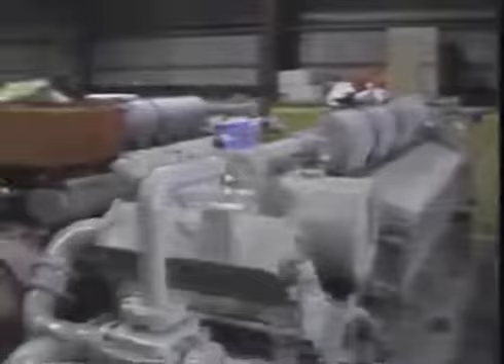This program will tell how to disassemble, inspect, and reassemble the unit. It'll also take a look at how to determine the condition of the parts and whether they can be reused or returned for exchange. Two other programs will show how to remove and reinstall a power assembly into the engine. In the last 3 programs, you'll see how to repair the liner, then the head, and last, the piston and rod assembly. When you finish watching these 4 shows, you'll have a real good handle on how to get a first-rate rebuilt power assembly from your own shop.

All right, let's get started on disassembling and reassembling. First, we'll look at the right way to move it around, and then how to make a preliminary inspection to determine if it's worth repairing. If it's not, we'll see how it should be packed for shipment. If it can be repaired, we'll look at tearing it down, inspecting the individual parts, putting it back together, and we'll look at selectively fitting pistons to liners. If you need to store it, we'll talk about that too. Last, we'll even qualify the rod bearings for reuse or rejection.

Before we start, here's a list of tools you'll be needing. It's lifted with a power assembly lifting tool. You can use a shipping case or some wood blocks to stand it up. You need a 3/4 inch drive socket wrench and extension, or an air wrench, a cylinder head lift tool, piston pulling eye bolt, a snap ring tool, a compression ring expander, a carrier holding fixture or a vise with copper jaws. You'll also need a bore gauge, thread lubricant, silicone grease, and some protectant like Tectyl or Cosmoline.

You may have already pulled your power assembly, so you might know that it has to be handled a certain way. The lift tool has 2 holes. Using one, it lifts straight up, and the other holds it at the right angle for entry to or removal from the engine. Care should be taken not to damage that rod while you're moving it or when you set it down to work on it.

Okay, time for inspection and disassembly. All your power assemblies should be taken apart so that you can find out how much damage there is, even if the whole pack is going to be returned. That's so you'll know what damages are there and you won't get stuck with overcharges when it's sent in for unit exchange. To tear down the assembly, you can start by standing it in its case.

Then remove all the holding tools and hoist. The next step is to remove the 8 head-to-liner nuts and washers with an impact wrench or a 3/4 inch drive ratchet. Of course, you'll reuse them later if they're in good shape.

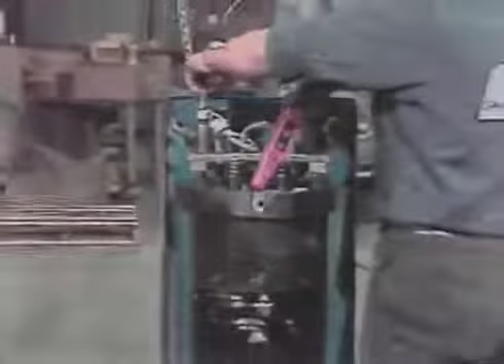Apply the head lifting fixture and screw the 2 long bolts, 6 or 7 full turns, to secure the fixture to the head. Tightening the 2 lock nuts evenly will separate the head from the liner. Apply the hoist and remove it from the liner. Put it on a clean surface and take off the lift tool.

Now you can use a knife or something to remove the gasket from the liner. You have to keep it level as you bring it up and off. If you don't take it off, then the piston rings will get caught on it as the piston and rod come out. Put the lifting eye into the piston with about 4 or 5 turns. Hoist it up to remove it and the rod.

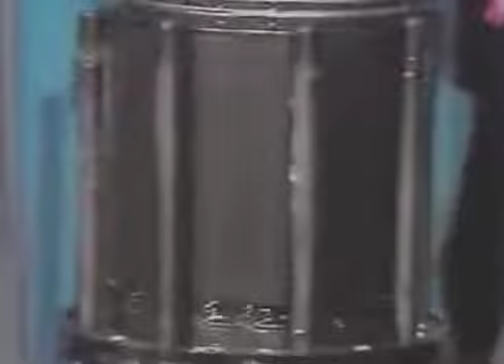Lay them carefully on a clean surface. You don't want to scratch anything. Take off the hoist and lifting eye.

If you don't have a shipping case that's empty and you have to lay your power assembly down to disassemble it, then there are a few tricks you should know. Get a wood block like the piston holding block and prop up the end of the liner. Before the head comes off, pull the piston and rod down until the bottom of the piston is even with the bottom of the liner. This makes it easy to get the snap ring off.

Then you can remove the rod, carrier assembly, and thrust washer. Reach inside the piston and pull it out. The elevated liner helps you to keep from scratching the piston skirt. Be careful during that last inch of pulling the piston — you don't want it to fall out. Support it with one hand so that you can catch it when it comes out. Now, pull out the support block.

Okay, break loose the head-to-liner stud nuts. Just barely, though, because now we'll put that block under the top end of the liner. All right, now, take off the nuts and washers.

The rest of the disassembly is just like we described earlier. Now we've got 3 units separated. Let's begin an inspection. We'll start with the piston and carrier assembly.

If you're tearing down your pack using a shipping case, you still need to get the piston and carrier apart. Get your snap ring tool and insert the ends into the 2 holes on the snap ring. Compress the ring with the tool and take it out. Now pull on the rod and carrier — it should come right out. You may need to jiggle it a little. Check the thrust washer; it may still be stuck inside the piston.

Now stick the carrier and rod assembly into the carrier holding fixture. After you remove the bolts, the rod will lift off. If you don't have a holding fixture, use a vise with copper-protected jaws to hold the rod while you remove the bolts.

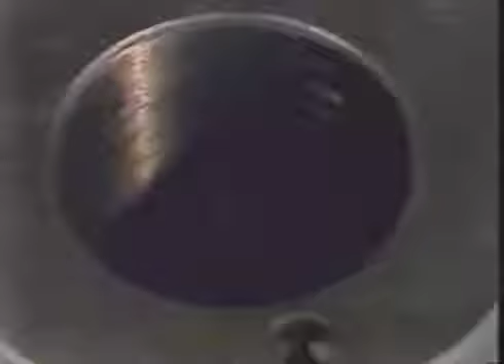If it's good, then leave the bearing in. If it's bad, replace it and the wrist pin. If the pin is damaged, then put a new bearing in with your new pin. You have to keep the bearing and pin mated, just like the basket halves should be mated with the fork rod.

Let's go over to the piston. Put it top side up and get your ring expander. Take the rings off, top one first. When the 4 rings are removed, you can carefully turn the piston over and remove the 2 oil scraper rings.

If you come across a ring that's stuck, get a screwdriver and insert it behind the ring at the gap end and pry outward. If that doesn't work, carefully use 2 screwdrivers to try and move or loosen the ring. At this point, if you think your piston needs any repairs, you should stop and watch the program on Repairs to the Piston and Rod Assembly.

The first step is to remove the valves from the head. The head should still be on a clean work surface of wood or cardboard to prevent scratching the firing face. It doesn't matter whether you use a single or multiple spring compressor. We're using a multiple compressor here.

It simply screws into 2 threaded holes designed for the tool. Once it's screwed in, bring the handles down to a horizontal position. This will allow you to get to the valve locks so that the springs can be removed. Once the locks are removed, release the spring compressor and remove the tool. The springs and the retainers will come right off, and the valves will slide out.

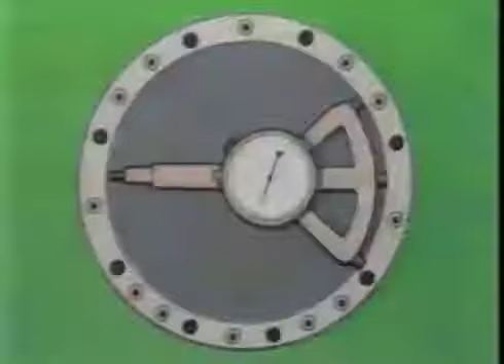Let's check the liner. Look in the water inlet hole — the deflector should be in good shape. If not, another one will have to be installed. You should get the liner bore gauge and check its dimensions at 90-degree angles, at 2 inches, 6 inches, and 12 inches deep into the liner. This is to tell you if the liner can be used again after being honed.

So let's look at the liner and piston together, because you need to make sure that their specs are good, or if selective fitting might be needed. You can mix pistons and liners in order to get within the tolerance allowed for piston-to-liner clearance. This is explained again in the liner repair section of this series. This selective fitting of pistons and liners is done only when the liner bore size exceeds 9 68/1000 inches at 6 inches from the top of the liner after the liner has been honed.

You can use a liner that measures 9.068 to 9.073 inches at that 6-inch location, but only if you find a piston that will leave no more than 22 thousandths piston to liner clearance. Say you had a 9.073 inch liner—you'd have to have a piston with a 9.051 inch skirt diameter.

Review the liner repair program for honing and cleaning procedures. The type of rings are critical too. Cast iron liners have certain kinds of rings, and chrome liners have different rings for the piston. You'll know what kind to use by looking in the parts catalog under your engine model number and choosing the rings for a cast iron or chrome liner, whichever you need.

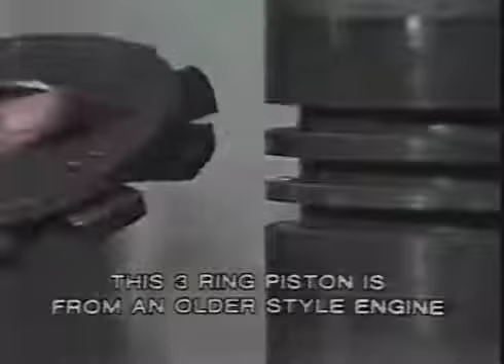While we're talking about rings, there's one more thing you need: the ring groove gauge to measure the top ring groove wear step. Keep trying until you find the one that just fits all the way into the groove, then measure again to find the one that goes in about three-quarters of the way. The difference is the amount of wear and is called the wear step.

Standard width rings are used in the lower 3 grooves. If the wear step is more than 3 thousandths of an inch, it'll have to be removed. If the whole groove is more than 201 thousandths of an inch, the top groove must be recut to 1/64 or 1/32 oversize. This will probably have to be done in a shop.

All right, let's look at where we are. We've decided whether or not our parts are good enough to reuse, and we've honed the liner and cleaned the parts real well. We should be able to begin reassembly. As we go, we'll oil every part to help protect it and act as a pre-lubrication.

We'll start with the carrier and work our way up. If a new piston pin is going to be used, put in a new bearing. If you use an old one, the same pin and bearing must be used, and the bearing should be in the same relative position to the pin as it was when it came out of the engine. Don't use a bad bearing. The bearing slot should be wiped clean with an oily rag.

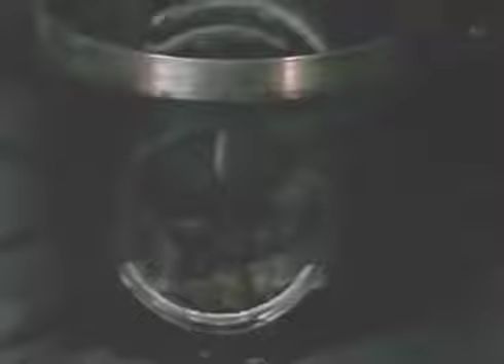And the bearings slid into place. Center it and check the tangs so that when we bend them, everything will be centered. Okay, strike the center of the tang with an indenter tool or screwdriver. Make sure it's snug as you go to the other side and do the same. It should not move at all.

Now coat the whole thing with fresh, clean engine oil. Get your pin, oil it, and slide it in so that the small index hole on the end of the pin is on the same side of the carrier as the piston cooling inlet hole. Make sure it rotates.

And then you can get the rod. Find the serial number on the rod and put it so that it too is facing the same side as the oil cooling hole on the carrier. Put some ThreadTex 2303 on the bolt threads and install the bolts.

Go ahead and tighten them down. Get the bolts down to about 10 foot-pounds and check the spacers. If they move, you'll have to pull that bolt and find out what's wrong. If the spacers don't turn, torque the bolts to 450 foot-pounds.

Now get the piston and install the rings. This is well explained in the program that deals with repairs to the piston, carrier, and rod. You'll put the bottom rings in place first, then the top rings. Always check for any rings marked top on the side and put the word top toward the crown. The number 4 piston ring is a tapered face Ferrox-filled ring.

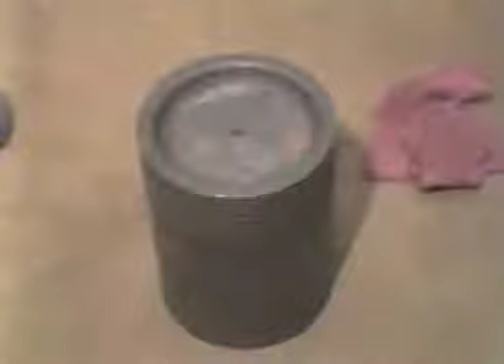If you have a chrome liner, the top 3 rings are going to be different, so make sure you've got the right set of rings for the liner you're working on. When that's done, turn the piston over very gently and make sure the inside is clean. Apply some new oil on the thrust washer platform and then put the thrust washer in place. Get the rod and carrier and put it into the piston. When it's seated, it should rotate freely. Get your snap ring and snap ring tool, and install it into the piston like this.

Now, with a feeler gauge, check the clearance between the ring and the carrier. It should not exceed 25 thousandths of an inch.

So much for the piston and carrier. Let's check the liner. Is it good and clean? Is the water inlet deflector in place?

If so, put the liner in the power assembly shipping case. That way you can stick the rod and carrier in from the top and get it down far enough to allow the head to be put on. If you don't have a shipping case, you could stand the liner up on blocks so that the rod goes down between the blocks just enough to have the piston crown go below the head-to-liner gasket surface.

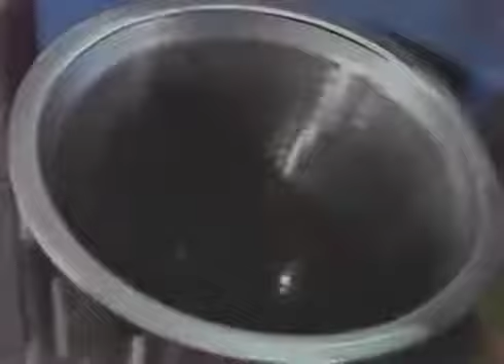All right, get your ring compressor sleeve and clean it out. Put it on the liner and oil it down. Oil the upper part of the liner bore, too, so that the piston rings will slide in okay.

Now, with the lifting eye in place, raise the piston and rod assembly with a hoist. Oil the whole piston surface. Check the ring gaps for proper positioning. The rod's serial number needs to be on the same side of the liner as the water inlet opening.

Carefully lower it into the liner. You might have to jiggle it a little bit so it'll slide on down. When you get the piston crown even with the gasket surface, you should go on far enough down so that the rod is hitting bottom to allow you to remove the hoist. Be sure and take off the lifting eye, too.

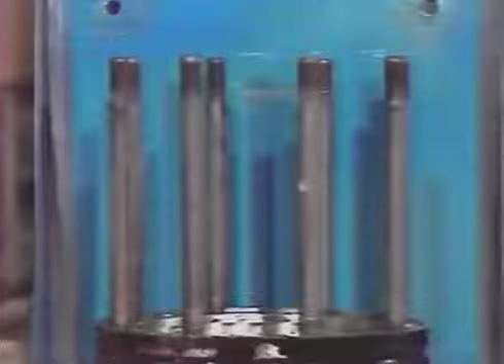Clean off the gasket surface. You don't want any dirt or oil anywhere along there. The gasket will have EMD Top 645 written on it. This should face upward. Be sure that the notched hole is over the pilot stud. The pilot stud has this little flange on it.

Now install the head-to-liner water seals and the heat insulators into the counterbores, and be sure they're not cocked in the hole.

Now you're ready for the head. You might need to put in some valves. If you do put some in, use only new or reconditioned valves. Repairs to the head, like the installation of valves, are covered in the videotape that you may have already seen. It's an easy process. Drop one in each of the exhaust ports.

We'll need to check the vertical distance from the fire face. Check with a feeler gauge to see what the distance is between the flat of the valve and the straight edge. It shouldn't be any greater than 93 thousandths of an inch. If it is, and it's a reconditioned valve, replace it with a new valve to try to get the required dimension.

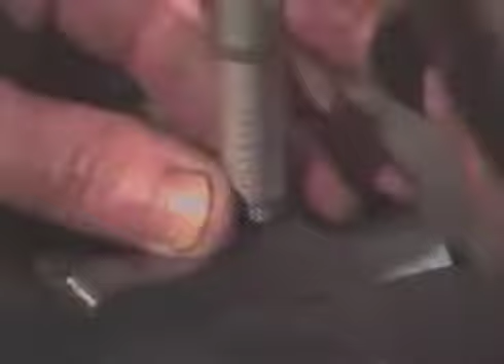If it's still greater than 93 thousandths of an inch, the valve seat has been ground too deeply into the head, and the head will have to be rejected. If all four valves pass this test, carefully turn the head right side up. Be careful not to slide it around. You might scratch the fire face.

Now install the valve springs and valve spring retainers, and put the spring compressor in place.

Now compress the springs and install the valve keepers. Make sure that they're in good condition before you put them in.

Then you can pull the valve spring compressor off.

All right, with the valves now in place, you'll need to check the stem height. This tool can do it, and it's called a valve checking tram. Again, Section 2 of the manual and the program on head repairs will explain this if you have any questions. The clearance must not be more than a 1/16 of an inch.

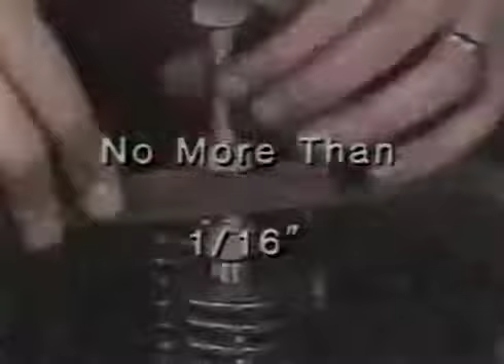If it is, replace the high or longer valve. Don't grind the valve tip, because these are hardened surfaces, and grinding could make them crack. Remember, 1/16 of an inch is the maximum clearance.

With that done, flip the head over and rest it gently on the rocker arm studs with the firing face toward you. You should have a valve seat seal tester. If it's old, you can test it on a piece of glass. It should stick for at least 2 minutes.

To test the valves, clean off the face real well and put a light film of oil on the tester cup. Stick it on over one of the valve seats.

It should stay for at least 2 minutes without losing suction. Just pull the release trigger to get it off. If the suction tester falls off in less than 2 minutes, the seat will have to be reground so you can get a better seal.

You should be ready to put the head on the liner now. Make sure the fire face is clean. Now lower it over the liner. The test valve hole should be directly over the water inlet hole. That way you'll also have the pilot stud in the correct stud hole. Recheck the water seals to be sure they're not cocked.

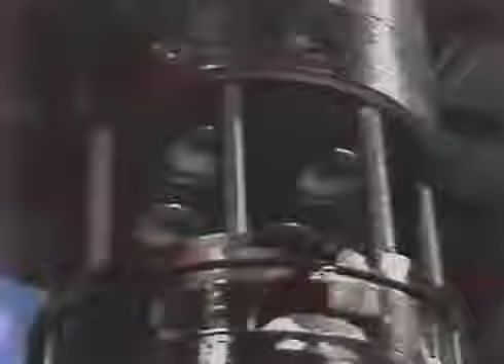If it stops before it's all the way down, it's because of the head lifting tool. Simply loosen the nuts until it goes down. When that's done, remove the lifting fixture and put on the hardened washers, and lubricate the stud threads with Texaco Thread Tex 2303. Now the nuts. Snug them down.

After they're snug, follow the proper torque sequence and torque them all to 75 foot-pounds. Then torque them all to 240 foot-pounds. You'll probably need someone to help hold the power assembly while you torque.

Okay, the nuts are torqued, so let's put on the water discharge elbow. Both the head and elbow surface should be good and clean. A red O-ring will be used between the elbow and the head. Two brown O-rings go on the other end and should be well lubricated with Dow No. 4 silicone grease. Put the elbow onto the head with the two Allen head bolts. Torque them to 30 foot-pounds.

If you're going to install it, don't lift it until you get the piston held in place. If you're going to store it, use the holding bolt and block. If you're going to install it into the engine, use the piston lifting tool. Either way, you should not lift it until your block or lift tool is secure and locked in place. Lift it on up and install the lower liner seals if you're going to install it into the engine.

With that done, put on the rod position clamp and you're ready to put her in the engine, except for one thing. Check your connecting rod bearings. If they're used bearings, they can only be used on the same crank pin journal. Used bearings may have some minor dirt scratches, and that's okay. If the scratches look severe, or if there are signs of discoloration, use a new bearing.

This area on the upper bearing shell where the blade rod rests is a pure lead flash overlay. Some of this area may show wear. That's okay, but like we said, if the wear looks bad, get a new one.

Okay, you've got a power assembly all ready to go. You can store it or put it in your EMD and expect many hours of trouble-free service.

So what do you do if you've got a part that's no good? Ship it. Same goes for anything that you're just not sure about because of not having the proper equipment to measure or check it with. Just about everything that you reject should be returned for credit.

Liners that are scuffed or worn beyond dimensional limits. Pistons that need to be regrooved. Heads that are scratched or nicked in the sealing areas. Or rods that are questionable.

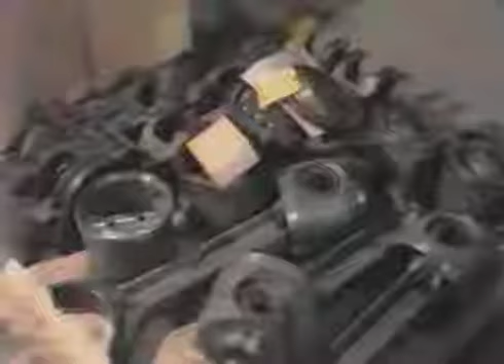Give the parts that you return or store a good coating of protectant like oil, Tectyl, Cosmoline, or something like that. Put it on thick. That salt air gets to metal real fast, and unfortunately, we have to pay for all the damage.

This rod is an example of unnecessary cost to the user of an engine. We feel that the parts that come back in on unit exchange should be as well taken care of as the parts going out. This rod has a smooth surface in most of the areas, but somewhere between the time it was taken out of the engine and the time it got into the shop, it was either rained on or salt watered on, and the blade of this blade rod is rusty.

If you have the original container to ship your parts in, that would be the best. If not, make up containers that are the appropriate size. If several parts are going in the same case, partition the case so that each part has its own compartment, because you know how careless some of these shippers can be.

If you're going to store any parts, make sure they're clean, well coated with oil, and tagged with all the data, like bore diameter and skirt dimension. Pack them up, too. It'll save on cleanup when it comes time to use them. More importantly, it'll protect them from damage.

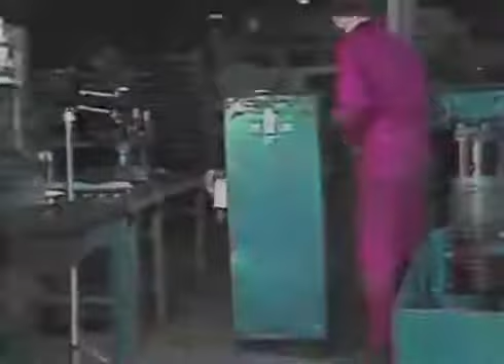Put on the wood block over the rocker arm studs and apply the bolts that attach to the back of the case. Then the rocker arm bolts need to be put on. If it happens to be a fork rod assembly, oil the basket halves and fasten them to the container. Then all that's left is to put on the cover and fasten it.

That's the whole process for tearing down and reassembling your power pack. The other programs on repairs will help you more on the actual repair work. Thanks for watching, and we hope each program will help you more than the last.

The piston and rod assembly are under a lot of pressure all the time, and the clearances are all extremely tight inside that cylinder. So anything that gets inside the piston area, like water or carbon or grit, that can crack, scratch, or score the piston, can end up causing an awful lot of trouble and costing an awful lot of money to repair.

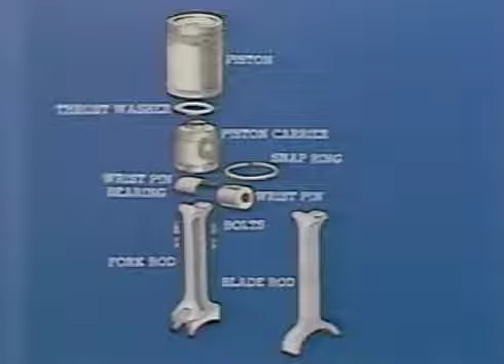The rod, which could be a fork or blade rod. The wrist pin, which is attached to the rod by 2 bolts. The wrist pin bearing. The piston carrier. The thrust washer. And the piston, which is held to the carrier with a snap ring. On the piston, there's also a set of 4 compression rings and a set of 2 oil scraper rings.

Now, getting all this apart is really pretty easy. If you just remove the snap ring with this special snap ring tool, the carrier should slide right out of the piston. Then, by taking the 2 wrist pin bolts out, the rod can be lifted off and the wrist pin can be slipped out.

Keep these parts together and don't remove the insert bearing. We'll figure out what to do with it a little later after we've inspected it. Finally, pull the rings off the piston. Use one of these ring spreader tools. If you try to get them off without one, you're liable to scratch the ring belt area, which could do enough damage to the piston to keep us from reusing it later.

Now comes the cleanup. We'll start with the piston. You're going to need some fuel oil, a wire hand brush, a scraper, and one of the old rings that you ground down to a point, like this.

Let me caution you about something. Use the scraper and wire brush only to remove the carbon from the crown. You can't use it on the side of the piston below the number 4 ring groove. And be careful in knocking the carbon off the piston crown. You don't want to put any scratches or gouges in the piston crown.

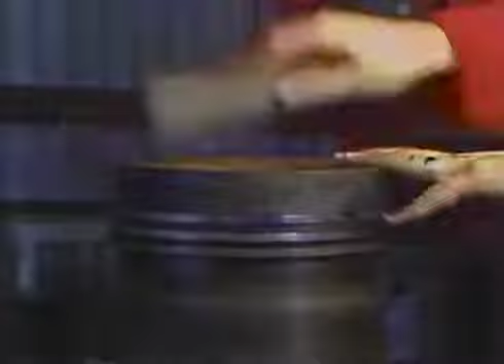Next, your ring grooves. You can use your modified ring that's been ground down to a point like this to get down inside of the groove. This is really an effective tool to use. Just scrape down in there until you've got all the carbon removed from all 4 grooves. Then give it a good rinsing with fuel oil and a steam bath with hot water.

And then blow it with compressed air to get it dry. Let me warn you one more time: don't use any abrasive, emery cloth, wire brushes, scrapers, or anything on the piston skirt below the number 4 ring. Now for the inspection.

Some of the obvious things we'll be looking for are scuffing, scoring, cracks, and mechanical damage that might have been caused by a broken ring or a bent rod.

Next, we need to check for the phosphate coating. Just because there's a little worn area on a piston where the phosphate coating is worn off doesn't mean the piston's no good anymore. You can have up to about 3 square inches of area where the coating is worn off before the piston has to be rejected. If this is the only problem the piston has, it can be sent in to be recoated with phosphate.

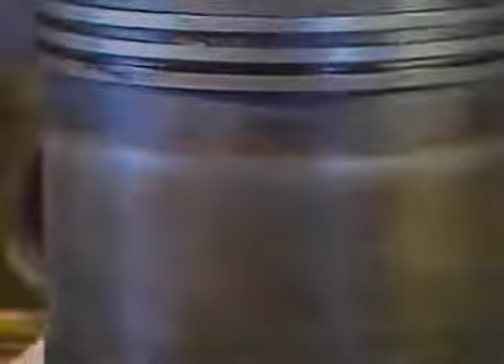Look at the ring belt area. This area is vulnerable to cracks. If there are cracks present, they might be hard to see because they generally start at the base of the groove in the top corner and run along with the groove. So just because you don't see any cracks, it doesn't mean there are not any there.

You can give it a good inspection by either having it magnafluxed or using a dye penetrant. If you suspect a crack, go ahead and check it with the dye penetrant. It'll work the same on all parts of the piston. We'll show you how it works on the crown of this piston. It comes in a 3-part package: the dye, a cleaner, and a developer.

The dye is sprayed on pretty thick. That has to set for about 30 seconds. Then you can wipe it off and clean it with the cleaning solution. Once that's dried, you can spray the developer on. Wait for a couple of minutes. If there are any cracks, you'll be able to see a red indication where the crack is.

Now, this piston doesn't have any cracks, but this head does. This is what your crack will show up looking like. Now, one place you're going to want to look real closely for cracks is the upper corner base of the top groove. That's where most of the cracks will happen, in the ring groove area.

Most of this wear you're going to find in the top compression ring groove. If it's more than this, you'll have to have the groove recut. But if it's going to exceed 201 thousandths of an inch after it's been recut, you'll have to have it recut to the next oversize for use with an oversized width ring. 201 thousandths of an inch is the largest width groove in which you can use a standard width ring. If it looks like you can have the groove recut and it will still fall within specifications, send it in to have it cut to the next oversize.

If you're going to go to an oversized ring, check Section 3 of the engine manual. It'll give you all the specifications you need for recutting the groove.

Now, the connecting rod shouldn't require anything other than just a general cleanup. Be sure not to use anything caustic or any alkaline cleaners on it. We're going to use Stoddard solvent, but you can use anything equivalent to Stoddard's that has a flash point above 140 degrees Fahrenheit.

Now, when you get down here to the blade rod slipper surface, you might find an oil stain. Don't bother trying to remove it because it won't affect the operation of the blade rod. If it doesn't come off with Stoddard's, don't use anything else, including steel wool.

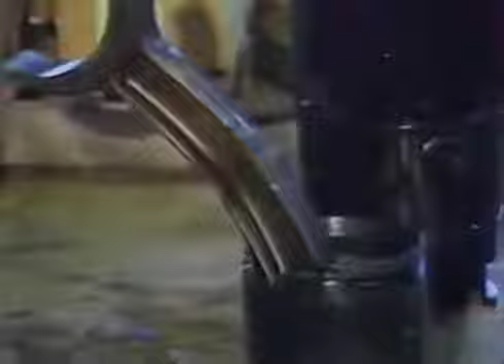Now let's take a look at the rod to see if it's got any severe damage. First thing you ought to look for is any evidence of physical damage. If you see any places where something's been rubbing up against the rod, or if you see that the rod's been bent at all, this is a good indication that this rod is going to fail. Now, if it's bent, the I-beam section might have a little area that's been rubbed away where it's been rubbing up against the liner skirt. If you see this, be sure and go over and check the liner too.

Now, down on the slipper surface of the blade rod, you want to check for overheating, scratches, nicks, rust, cuts, or galling. This should be perfectly smooth. Remember, it seats up against the bearing. Anything down here that indicates there's been a problem should be checked out, and if the problem looks like it might affect the performance of the rod, it should be scrapped.

Now you might see a blue-black discoloration at the top side of the blade rod slipper foot. This is caused by the heat treating process during manufacture. This is normal, it's not caused by operational overheating. The surface itself shouldn't show any signs of heat discoloration.

Next, check the serrations of the fork rod. You're going to be looking for fretting or cracks. The basket halves should fit right up into the serrations, and there shouldn't be any binding at all.

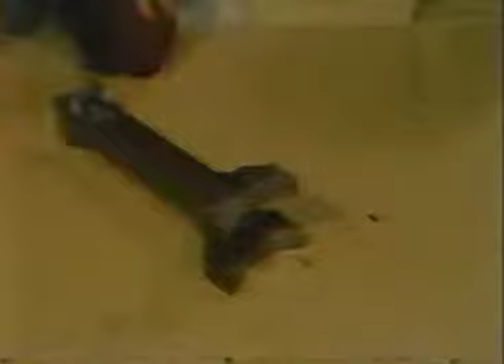Now, anywhere on the rod that you think you see a problem, take a good close look at it. If you can get it magnafluxed, this is a good way to be sure. If not, and you see an area that looks like it might have a problem, check it with the dye penetrant system. If you're not just absolutely convinced that the rod's in good condition, don't take a chance. Set it aside for either a more detailed inspection or send it in and have it inspected with the proper tools.

Now there's one other check on the fork rod that you can do, and you need this plug gauge to do it with. This gauge has a go end and a high end. What you need to do is try to thread the go end into the bolt holes that are used to hold the baskets onto the fork rod. The go end should thread into the holes.

Now as you screw it in, be sure and notice any binding that occurs or any indication of damaged threads. This go end will generally screw in pretty easily. If it wobbles a little bit, you're okay. If it wobbles a lot, you might have a problem. Turn the gauge around to the high side and see if it threads in. Now this isn't a no-go gauge. If it screws in freely, it indicates that you might possibly have a problem. If it's snug or tight, you know it's okay.

If it shakes or wobbles, both the rod and basket should be scrapped. At this point, check your bolts. If they are defective, replace them with new bolts.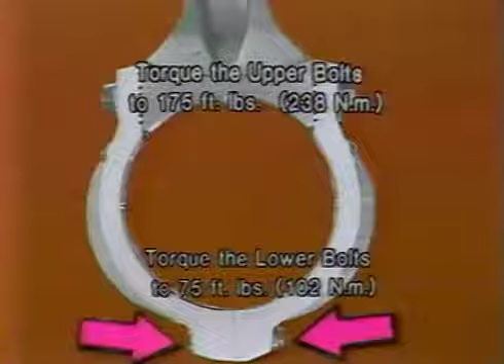The last inspection for the rods that we have is made on the fork rod only. Screw the basket halves together and attach them to the fork rod. Torque the upper bolts down to about 175 foot-pounds, which is 238 Newton-meters. The lower basket bolt should be at about 75 foot-pounds, or 102 Newton-meters. Now, take 3 readings at about 60 degrees apart.

Now be sure to keep the basket halves with the fork rod. These things are line bored as a complete unit and aren't interchangeable with any other fork rods.

Now back up at the saddle end of the rod, you need to take a look in the area that the piston pin sets in. First thing you may be able to see is this figure 8 pattern. This is where the piston pin contacts the saddle, and it's a normal condition.

If you see any nicks or protrusions or fretting, you need to take a fine cylindrical stone or 150 grade abrasive paper and remove them.

Now take the thrust washer off and clean it with a soft cloth. Really, about the only inspection you can make is a visual inspection for galling or overheating or cracks. If you see any damage like this, you'll have to replace the thrust washer.

Take a measurement with your micrometer. Measure the thrust washer thickness at these points. Minimum thickness is 175 thousandths of an inch, and take a reading at several points. You shouldn't see more than 3 thousandths of an inch variation in the thickness. If you do, then replace the thrust washer.

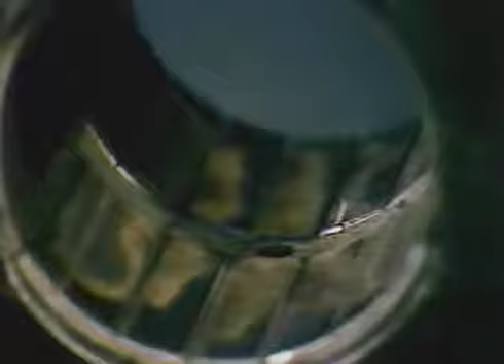The insert bearing is the most critical. Don't remove it until after you've determined whether it can be reused or not, and this is just a visual inspection.

Let's clean it up first. Find yourself a wooden stick. You might cut a point on it so you can get down into the grooves of the insert bearings to clean them out. Don't use anything metal down here because this is a really sensitive surface. It's silver coated, and if you use anything harder than the silver, you're going to end up scratching some of that silver off of there.

If you do that, you're going to have to replace that bearing, and it ain't cheap. Once you've got that done, you can go over the bearing with a petroleum solvent that's got a high flash point, something like Stoddard solvent.

Now, don't ever use an alkaline or caustic solution to clean these parts with, or abrasive materials like steel wool or emery cloth. I don't care how stubborn the carbon is on these parts. Anything abrasive is going to damage the bearing beyond use.

Okay, now let's take a real close look at that bearing. We're going to be looking for damage like galling, smearing, or scoring of the bearing material, or for relatively large areas of pitting from corrosion, or flaking or shelling of the bearing material. Anything that looks like it might create friction between it and the wrist pin.

If you see any signs of anything like this, the bearing will have to be replaced. Now we'll go over how to replace the bearing in just a minute.

If the bearing looks like it can be reused, check it to make sure it's tight. It shouldn't jiggle back and forth at all. If it is loose, take a punch and a hammer and tap the tang down a little bit so that the bearing is nice and snug.

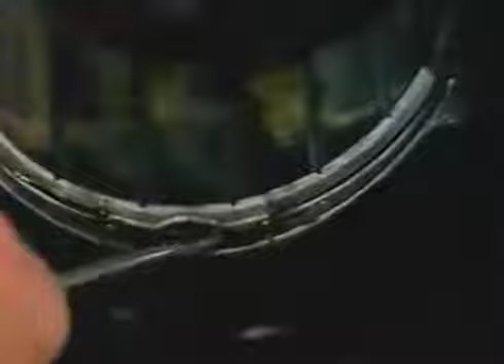Now, let's take a good close look at the carrier and go over the procedure for replacing the bearing. If you have to replace it, just pry the tang up and the bearing should slide right out. It might be a little bit tight because of carbon buildup back between the bearing and the carrier, but it shouldn't be all that hard to get out.

Clean this area out real good. Get all the carbon and trash out of there. Wipe it dry. Very carefully, and you've got to handle these bearings carefully, remove the bearing from its packaging and slide it into the carrier.

Tap one of the tangs down, then position the bearing so that it's snug against the bent tang. Then tap the other tang down. Make sure that they're locked tightly in place and can't slip out. It should be perfectly tight. On the carrier, we're going to be interested in looking for damage along the thrust washer platform area, in and around the insert bearing.

Look for evidence of heat discoloration or galling and tearing of metal on the thrust washer platform. Anything that would keep the thrust washer from spinning freely over the platform surface is going to be a problem later on, so pay close attention to this area. If you see any potential problems, be sure and put the piston carrier aside for closer examination.

Well, that takes care of the inspection and repair work that we can do on location. Now let's reassemble our parts so the piston and rod assembly can be put back into service.

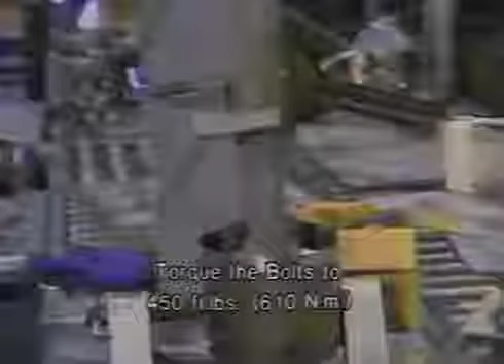The rod should be bolted on next. On both the blade rod and the fork rod, the serial number should be facing the same side as the piston cooling inlet oil hole in the carrier. The bolts should be lubricated with thread techs and tightened to about 10 foot-pounds. Check the spacers, then torque the bolts to 450 foot-pounds.

Now for the piston rings. Make sure you've got the proper sized rings for the piston you're using. Refer to your EMD manual or parts catalog. Set the piston with the crown facing down.

The double hook scraper ring goes on first with the word top pointing toward the piston crown. It goes in the number 2 groove. The bottom ring, the spring-loaded oil control ring, goes in the last groove. Be sure you put the spring ends 180 degrees away from the ring gap. Install the ring with the word top pointing toward the crown. Make sure the spring gets seated in the ring. If it doesn't, the ring will break when the piston is installed in the liner.

Turn over the piston and put on the top ring. The number 4 compression ring is next. It's marked top 2. The top should face the crown.

The second and third compression rings are identical and can be put on either way. There isn't any top or bottom. As you put all of these rings on, be careful not to scratch the sides of the piston.

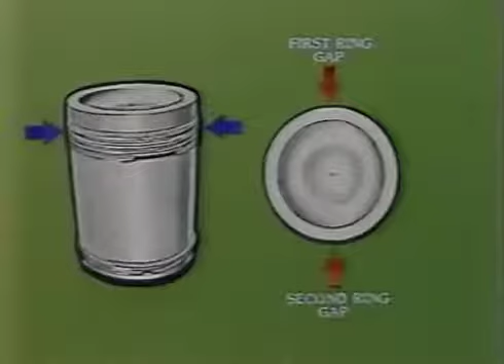Once that's done, adjust the ring gaps so they're staggered. The first and second rings must be 180 degrees apart. The third should be 90 degrees from them. The fourth should be 180 degrees from the third. The oil control rings should be 180 degrees apart from each other. You'll be checking this again just before you install the piston.

Meanwhile, don't set it down on its side. You might pick up trash in the ring area that will cause problems later, or you might damage the bottom rings.

Turn the piston upside down. The thrust platforms and thrust washer should be lubricated. Then put the thrust washer on.

Now the carrier can be installed in the piston. It should bottom out so that you can get the snap ring into the snap ring groove. Now check the snap ring clearance. It shouldn't be more than 25 thousandths of an inch.

Okay, this piston assembly is ready to be installed into the liner. We check the piston crown inside for cracks. We check the wear step in the first ring groove.

We've replaced the rings. We checked the thrust washer platform surface. We checked the thrust washer. We checked the piston carrier and the piston pin and the insert bearing. We also checked the condition of the rod and of the slipper surface of the blade rod and the basket area of the fork rod. That's really about all you can do on the rod.

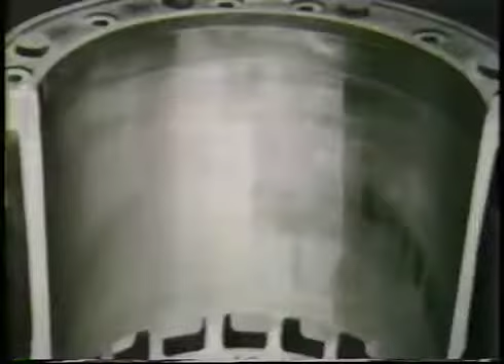The liner is where all the action takes place. In fact, 16 miles of piston passes across the liner's surface every 60 minutes. With all this metal-to-metal contact, and considering the close tolerance of the piston and cylinder, wear is just going to occur. In this program, we're going to take a look at the liner bore that's been removed from an engine and evaluate the damage. If it's repairable, we'll show you how to ream the wear ridge and hone the liner. If it's not repairable at your location, we'll tell you how to determine whether it can be repaired in a shop or not.

One of the first things you ought to do is make sure the liner is completely clean. If it's not, give it a good thorough cleaning with some sort of solvent, fuel oil, Varsol, or something like that. If you find carbon or oil that's really baked on, you can scrape it off if you have to, except in the liner bore area. Make sure that all traces of the old head-to-liner seals are completely removed and the counter bores are clean. After that, finish cleaning it and give the entire liner a good visual inspection.

The most critical area for visual inspection is the bore area itself. First, you should check the liner bore condition and be looking for things like scuffing, cracks, port milling, framing, and gouging. We found a liner that has a lot of these problems, and Mac McGee of Geosource's Power Systems Division is going to go over the problems of this particular liner.

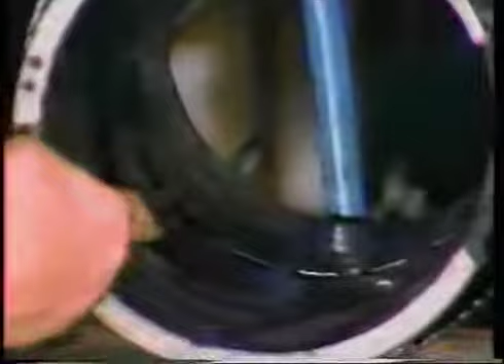The next area to check is the top of the liner, across the gasket sealing surface. Be looking for any signs of damage or erosion. You might also keep a close lookout for any cracks on the base of the upper pilot at the junction of the gasket surface. If you see any, well, this is a sure sign of overheating. Either one of these two conditions will be enough to cause rejection of this liner.

The last visual check you'll need to make is down around the skirt of the liner. Check for milling. If this liner was run with even a slightly bent rod, the rod probably began milling a little metal around this area. If you see any, reject the liner.

As we said at the beginning, a lot of close metal-to-metal contact occurs in the liner area, so there is going to be wear. A piston has to fit in a liner with very close tolerances, and if the inside diameter of the liner is worn or honed out too far, the piston's fit will become sloppy. EMD has come up with maximum specifications for piston fit.

Before you do any honing or reconditioning to a liner, you should check the inside diameter to make sure that when you're through honing, the liner will still fall within EMD specifications. There's a tool for this called the liner bore gauge, which checks for out-of-roundness and liner inside diameter.

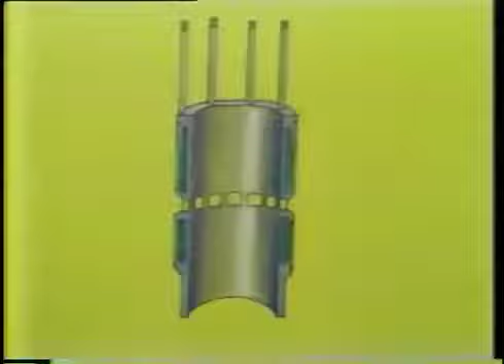At 3 points—2, 6, and 12 inches from the top of the liner—you should take 2 readings 90 degrees apart to determine if the liner is out of round or out of spec. Your first reading should be made with the gauge pointing in the same direction as the crankshaft. Before honing, it shouldn't read more than 9.066 inches at 2, 6, and 12 inches.

If you see more than 5 thousandths difference in the second reading, 90 degrees away, the liner should be rejected. There's a possibility the liner can be bored to 30 or 60 thousandths of an inch oversize, which is a shop repair and shouldn't be attempted on location. If you're using an oversized liner to begin with, you'll be able to tell by the inside diameter whether it's been bored, and whether it can be bored again.

Before you start honing the liner, if it's close to exceeding EMD specifications and you have scuffing or damage you can feel, by the time you finish honing it will probably be out of spec, and all your time and effort will have been wasted. Be sure, before you put in the effort, that it's going to be within specifications after you finish honing.

After honing, the maximum dimension allowable by EMD is 9.068 inches at 6 inches deep into the liner, unless pistons and liners are selectively fitted. Then the maximum dimension at the 6-inch location would be 9.073 inches, providing a piston of 9.051 skirt diameter is used.

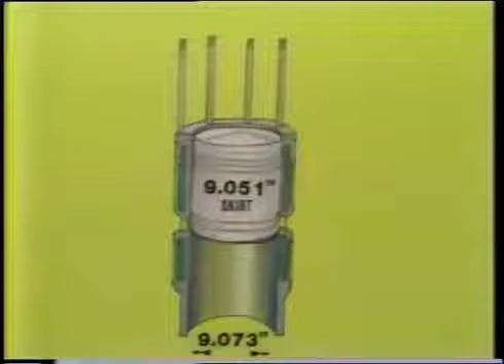This will ensure a maximum allowable piston-to-liner clearance at the 6-inch position of 22 thousandths of an inch. If not selectively fitted, the maximum liner diameter at the 6-inch position would be 9.068 inches. The maximum dimension allowable at the top limit of piston ring travel is 9.083 inches.

Once you're through with the visual inspection of a liner, and it passes all the points brought out so far, the next thing to do is check the wear ridge. The wear ridge results from the rings wearing against the cylinder wall. When the piston is at top dead center, you'll notice the rings don't reach the top of the cylinder.

Since the rings aren't wearing on the upper one and a quarter inches of the cylinder wall, this portion isn't subjected to quite as much wear as the rest of the cylinder wall. This is what causes the wear ridge.

Before the liner can be honed out, the wear ridge has to be removed, and this can be done on location if you have the proper equipment. You need a liner ridge reamer, which can be operated either by hand or with a heavy-duty drill motor if you use a speed reducer.

This is a critical operation, so be sure to read this portion over in your EMD maintenance manual, section 4, before you attempt it. However, if you don't have the proper tools, don't try to do this—just pack the liner up and ship it for reworking.

If you do have the proper tools, make sure you know how to operate everything correctly and that everything is in good condition. Then read the instructions in section 4 of your EMD maintenance manual. First, check the cutting blade of your reamer and make sure it's in good condition. If not, you might have to resharpen it or replace it with a new one.

Before you set the reamer inside the cylinder, oil the cylinder walls, and be sure the felt pad in back of the cutter is full of oil.

Naturally, you'll need to retract the cutting blade so it'll be out of the way when you set the reamer down inside the cylinder wall.

The reamer should be set down inside the liner until the depth stop rests on top of the liner. Once you've got it seated down in there, tighten the centering nut to hold the reamer in position. Turn it 1 or 2 turns to make sure that it's centered up.

Now you're about ready to start reaming. You'll need to pull the blade retarder cam back to allow the cutter to be released and move into position. Then turn the reamer a couple of turns manually to get it started.

If you're using a motor, you can use an ordinary heavy-duty electric drill that operates at about 500 RPM without a load. But you will need to use a motor drive and speed reducer. Once the speed reducer is in place, you can start reaming with the motor.

Keep plenty of oil on the surface being cut. Continue to turn the reamer until all of the wear ridge is removed.

Once you've completed this, you can pull everything out and give the liner a good cleaning. Make sure that you get all of the oil and cuttings out of the liner.

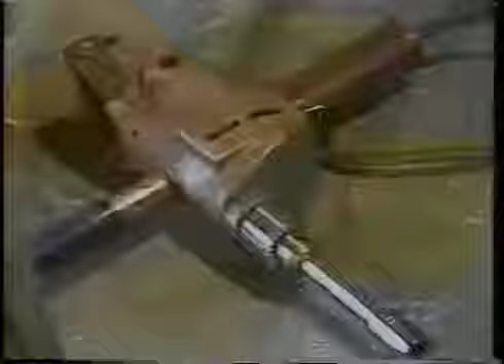Now the last step in reconditioning the liner is honing. For this, you'll need a honing kit, electric drill, stone cleaning brush, and a cylinder honing fixture.

The reason that a cylinder is honed is to knock off the glaze and provide a surface that new piston rings can seat to, and to remove light scuffing.

The object is to have a slightly rough finish inside the liner with a 45-degree crisscross pattern that covers the entire liner wall. This is done by moving the hone up and down in the cylinder at about 30 complete strokes per minute. This will give you the 45-degree crosshatch pattern that we're looking for.

Now, before you go any further, make sure the cylinder you're about to hone is a cast iron cylinder. If it's a chrome liner, it'll have a mirror finish. Don't try to hone a chrome liner.

Now, the hone has to be equipped with a set of W47-J43 stones and guides to protect the surface and finish it off to the proper roughness.

Be real careful in installing these on the hone. If you damage them, you'll have to get a new set, and these things aren't cheap. Check and make sure that they're clean. If they're not, you might want to clean them with a wire brush.

Before we get started, let's take a look at the way it's done in the shop. A cylinder is put into position in a rig similar to this.

The rig makes 30 strokes per minute. The liner wall is continuously washed down with fuel oil.

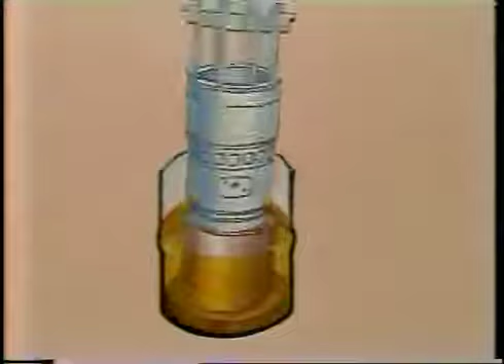You're probably not going to have one of these rigs out on location. So the easiest way for you to set up to hone your liner is to set it in a tub that's capable of holding 10 gallons of fuel oil.

The liner should be set in the tub, top side up. Fill the tub with fuel oil up to a point that the hone will be able to wash itself on the downstroke. As the hones turn and move up and down, the liner walls will be continuously flushed with fuel oil, and you want to make sure that the liner isn't going to be moving inside of your tub while you're doing the honing.

Now set the hone into the cylinder so that the stones don't stick out of the top of the liner more than ½ an inch.

On the center pinion assembly of the hone, you'll find a ratchet type affair for tightening the stones against the wall. They should be snug against the liner wall, but not torqued down.

Now you're just about ready to start honing. Your motor should be capable of somewhere between 345 to 500 RPM. Start your up and down motion with 30 strokes per minute.

Every now and then you might have to stop to tighten the stones up a little tighter against the wall. You should never let them run loose. This doesn't do any good as far as roughing the surface, and it could allow the stones to chatter inside the liner if they get too loose.

This can permanently damage your liner. As the hone turns, if the pressure is right, you'll hear a steady grinding noise.

Just hone long enough to break the glaze and be sure all of the surface area is honed. Then you start hearing the drill motor spinning without any strain on it. Best thing to do is adjust your tool.

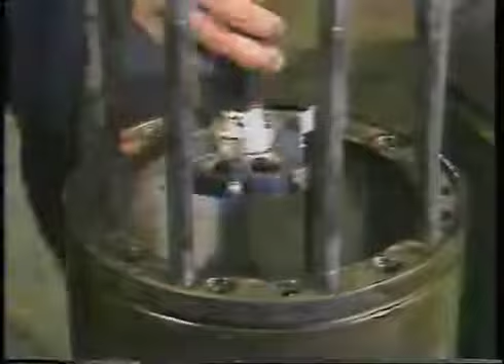If you plan on storing your liner, make sure that you have plenty of oil left on the surface of the cylinder walls to keep it from rusting or corroding. To replace a broken liner stud, it'll probably be necessary to remove it with one of these gadgets or by drilling and using an easy out.

Once the broken stud is out, a new stud may be applied after checking the threads in the liner with a tap. In addition to the standard size, there are various oversizes, as shown in the EMD parts catalog, in the event the standard stud is loose.

The new stud should be driven so it extends 9.5 inches above the gasket surface. Use a minimum of 50 foot-pounds torque.

Be careful. There are 2 different type studs on a liner. One is the liner locating or pilot stud. It has a shoulder just above the gasket surface of the liner. This stud can only be used in the position above and to the right side of the connecting point for the water inlet jumper.

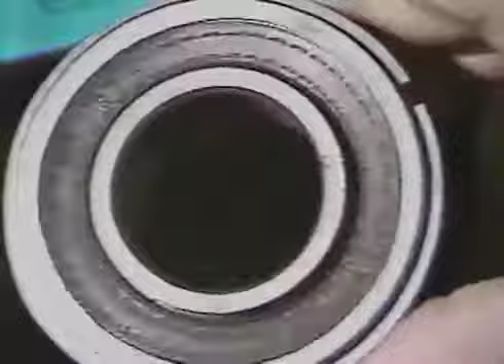The water pump has always been one of the weak points in the EMD. Most of the failure reports that we get in Dallas on water pumps are bearing-related problems. So EMD introduced a new sealed bearing to help improve the life and reliability of the pump. This bearing comes separately or as a part of their repair kit. Like I said, most of the problems you'll see with the water pump will be bearings, and they're usually pretty easy to determine. Mac McGee has some tips for you on this.

Basically, there's not any real good way of troubleshooting a water pump.

The main thing is you'll find that the engine's not cooling, and naturally the first thing you suspect would be a water pump. As you go around through your engine room, get accustomed to the noises these engines create. As you walk past the front end of this engine and the noise sounds different than it did yesterday, go check the water pump.

You can take a screwdriver and put it against this part of the housing for the bearing next to the gear train, or this part of the housing for the bearing out next to the impeller, with your ear against the other end of the screwdriver, and you can definitely hear the bearings running in that water pump. If you don't hear anything unusual there, go to the other side of the engine and try that water pump. Most assuredly both water pumps are not going out at the same time. Whichever one's the roughest, that's the water pump giving you the problem.

One of the other things to look at is possible discoloration in this area right here. When you get that discoloration, that bearing has already failed. It's going out on you completely. The water pump is overheated in that area, and you need to shut the engine down immediately.

Before you start your overhaul, make sure that you have a full EMD water pump repair kit. In addition to the bearings, it comes with most everything you'll need: the gaskets, seals, self-locking nuts and bolts. It's all in there. It's kit number 954768-3. Now don't skimp by trying to replace just the bearings. Compared to the price of a new water pump or the price of 8 power assemblies, it's cheap. In 1983, the full kit listed for $102, so don't skimp. When the PMS calls for an overhaul, put the full kit in.

The removal and installation are pretty straightforward, but do remember to drain the cooling system before you take one off. You remove this dresser sleeve, take this line down at both ends, remove the bolts around the face of the water pump where it goes onto the accessory drive housing, and slip the water pump out.

What we're really interested in is the disassembly, inspection, and reassembly of the pump. Let's start with the tools. Some of them are special tools, but they're things you can make pretty easily on the rig. These two, for example, help drive the bearings onto and off of the shaft. This green one's a 2-inch diameter pipe, 10 inches long, with one end having a plate welded over it. The red one's a 2-inch diameter pipe, 8 3/4 inches long. Notice that this wall has been beveled down on the inside diameter.

We'll be using the gear puller, a rubber mallet — the manual calls for a rawhide mallet, but this one works just as good — and various sockets and wrenches. And you'll need your repair kit.

Before we start disassembling the water pump, let's take a quick look at how it's made. The water pump shaft is held in the casing by 2 bearing assemblies. These bearing assemblies are spaced apart by a bearing spacer. The inner bearing is held in place by a retainer and snap ring to absorb the thrust in the shaft. On one end of the shaft is the drive gear, on the other end is the impeller. Both are locked to the shaft by Woodruff keys and held in place with self-locking nuts.

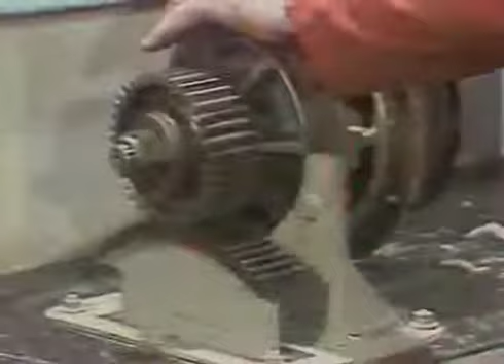This box is used to suspend the pump so that the bearing assembly can be dropped into place, allowing gravity to help keep it straight so that it doesn't bind, and so the shaft can drop straight down without hitting anything. This pump support bracket was designed by one of the mechanics on the Sedco 471. It's pretty easy to make, and it makes torquing and untorquing the shaft nuts a lot easier without damaging the teeth.

It's made out of a damaged idler gear. A sixth of the gear has been cut out here and welded to a mount so that the pump drive gear is locked in place when the pump is bolted on. If you don't have a damaged idler gear, a half of a damaged drive gear will work just as good.

The first thing you want to do is loosen the impeller nuts and suspend the pump gear end upwards so that it just clears the workbench. Then remove them. Once the nuts are off, the housing might let loose on its own. This one did. If it doesn't, use your rubber or rawhide mallet to tap it and break it loose.

Make sure that your water pump isn't more than a few inches from your workbench so that when the impeller housing drops off, it doesn't fall very far and get damaged. Once you've removed the housing, you can pull the pump off of your support.

And now would probably be a good time to inspect that impeller. You want to be watching for problems like this. Things like this will cause the pump to be unbalanced and could cause other damage inside of the pump if it's reused. Be sure to look very carefully for any signs of damage at all that might cause the impeller to be unbalanced.

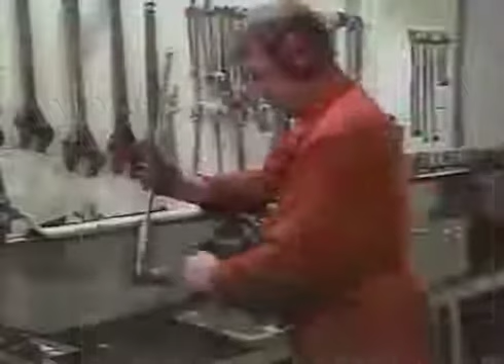Next, pull the drive gear nut and washer. Be careful not to damage the gear teeth if you're using a vise. Before you take it off, you also want to remove the impeller end nut and washer.

Now, the drive end nut and the impeller end nut are both self-locking. They should only be used once. If you reuse one, there's a good chance that it'll loosen and come off inside the engine.

There's the result of something like that happening. This drive gear loosened while it was operating inside of the engine. The vibration of the loose gear broke these teeth and these teeth on the idler gear. This type of repair, if this pump can be salvaged, will end up costing thousands of dollars and a lot of man-hours. So when you take these nuts off, be sure you throw them away.

After you've got the two nuts taken off, you'll need to use your gear puller to pull the drive gear off. It's held in place with a Woodruff key. So you'll need to be sure and get the key out too.

Next, you'll want to remove the bearing snap ring and bearing retainer ring.

There's one thing you might notice here. Take a good close look at the edge of the housing. This one's been chipped and eaten away. We'll take a closer look at it a little later, but this housing may have to be replaced.

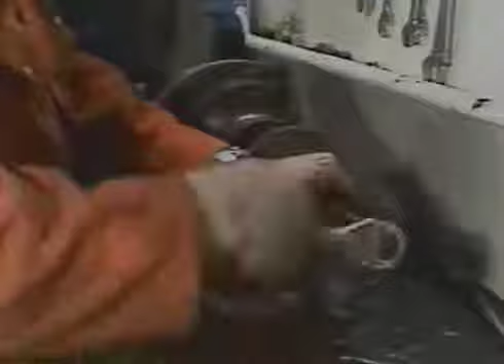Next, you'll want to put your gear puller or impeller puller on the impeller end of the shaft. Notice here that we're putting the legs across the outer housing and not on the impeller itself. If your impeller is any good, you'll damage it by putting the legs on the impeller. As you press the shaft out of the housing, the impeller will release and you'll be able to take it off of the shaft. You'll also free the shaft up as the bearings disengage from the housing.

It's a good idea, once the shaft reaches this point, to go ahead and pull the impeller off and remove the impeller shaft key and the seals. The seals consist of a spring, a seal retainer, an outer seal, and a carbon seal. When you're rebuilding your water pump, these are some of the main items that are replaced.

A little light tapping with a block of wood, and you'll be able to easily work the shaft and bearings out of the housing. Don't hit it hard. If it locks up on you, it's because it's coming out crooked. Try to straighten the shaft out as much as you can, and continue to tap lightly with your block of wood. It shouldn't take a lot of force to get this out.

The next step is to remove the stationary bushing. It's held in place by 6 bolts at the rear of the water pump. This is replaced too because the bottom surface is what the carbon seal seals against. If there are any scratches or scores at all, the seal won't have integrity.

Once the 6 bolts have been removed from the stationary bushing, it may or may not come off easily. If it's stuck, a few taps with a rubber mallet will loosen it. If not, there are 2 threaded back-off accesses. You can use the bushing bolts to back the stationary bushing off of the pump housing.

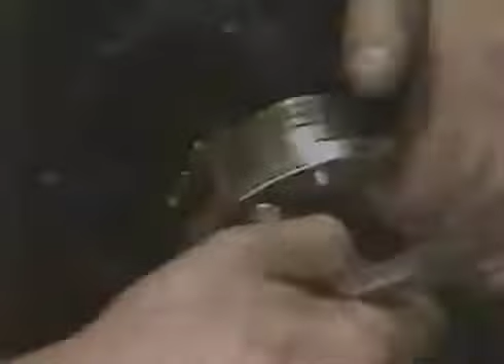The next step is to remove the bearings because we're going to replace them. The inner bearing has a snap ring groove, the rear one doesn't. The shaft assembly consists of the shaft, the water slinger, the outer bearing, the bearing spacer, and the inner bearing. On the older bearings, both the inner and outer bearings are designed with an offset on one side. These offsets should always be positioned to the outside of the shaft. If you have any question as to which side we're talking about, the part number is stamped on the offset side.

That part number should always point to the outside of the shaft. The new bearings are offset on both sides. Don't forget that the inner bearing has this snap ring too. Mount the shaft assembly in your vise with jaw protectors holding on to the bearing spacer.

Attach your gear puller to the inner bearing and you can carefully pull the bearing off. Be careful not to drop the assembly when the inner bearing comes off. Then the bearing spacer will slide off.

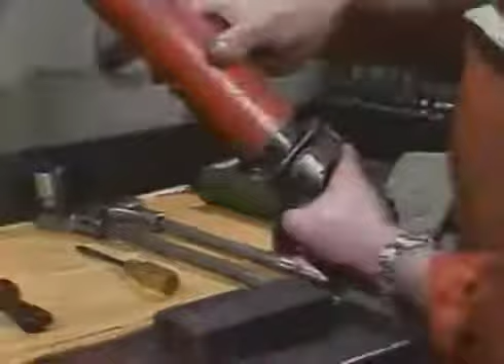This tool that we were talking about earlier was made in the shop. It fits down over the bearing shaft assembly, and you'll notice that the edge has been tapered off so that it matches the taper on the water slinger. We're able to drive the bearing off easier with this thing without damaging the water slinger. This tool will only drive it off of its own bearing seat. Use the gear puller to pull it off of the other bearing seat.

Once this is done, you'll need to give the shaft a good inspection. In fact, all the parts ought to undergo a very close inspection to determine whether or not they are reusable.

Now, remember a little earlier, we were talking about this part of the housing. If you take a good close look, you'll see that there's a discoloration near the bearing area, and it looks like some parts of the neck have been overheated and chipped away. Whatever caused it, it's obvious that it'll have to be scrapped. Here, compare it to a new housing. See the difference?

Also inspect the impeller for any damage at all. An unbalanced impeller will cause a lot of damage real fast. Be sure to inspect the impeller housing. Before reinstalling an impeller, check to make sure that all of its parameters are right. There has to be the proper clearance between the impeller neck and the impeller housing.

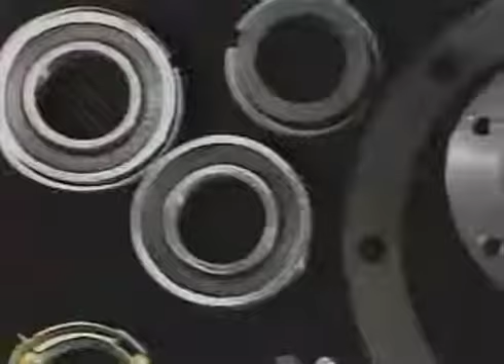You can order the bearings with a new water pump repair kit. Here's the part number, 954-7683. This kit includes the gear end bearing and the impeller end bearing, as well as all of the seals and gaskets you'll need to rebuild the water pump. It also includes a new stationary bushing. We recommend that whenever you rebuild a water pump, replace all of these parts with the new kit.

A little silicone grease on the bearing seating surfaces will make it easier to get the bearings installed. Here we're installing the old style bearings, but you'll probably be using the new style. The inner bearing is the one that does not have the snap ring groove. It can be installed either way if you're using the new style.

If you're using the old style, there's an offset that should point to the outside of the shaft. A few easy taps, being careful to make sure the bearing is going down straight on the shaft. Light taps should be all that's needed to get the bearing seated. If you have trouble driving it on, it may be because it's cocked, so be sure it's going on straight.

You'll need to drive it down all the way, flush against the water slinger. Next, the bearing spacer sleeve goes on. It can go either way.

Then, finally, the outer bearing, the one with the snap ring groove. The offset points outward, and the snap ring goes to the outward side. Again, a few taps on the bearing will cause it to seat right into place.

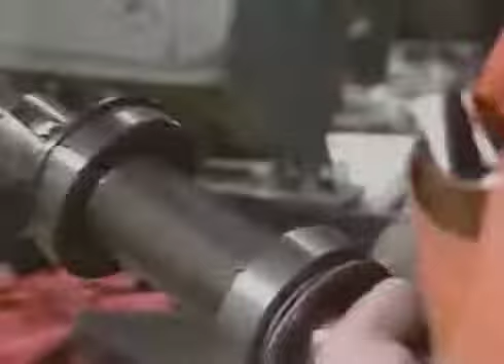Next, set the water pump housing in a holder of some type. Before you install the shaft assembly, be sure to put silicone grease on the bearing seat surfaces. This will help when you install the assembly by lubricating the surfaces as the bearings are driven through the housing. A little silicone grease on the inner bearing itself is a good idea too.

Now you'll need to tap the shaft into place, slinger in first. It's going to be a tight fit, but you don't have to use a lot of force, just moderate taps. As you seat the outer bearing in the outer seat, make sure that the shaft is perfectly straight.

Then go ahead and drive the shaft and bearing assembly all the way down until the snap ring meets the groove that holds it in place.

Once the bearings in the shaft have seated themselves, install the bearing retainer ring and the snap ring. Make sure the snap ring seats all the way. Once you've got the snap ring in place, make sure that the shaft still turns freely.

The next thing to be installed is the stationary bushing. Make sure it's perfectly clean. This gasket goes between the bushing and the housing. You should use those 6 special self-locking bolts on this bushing.

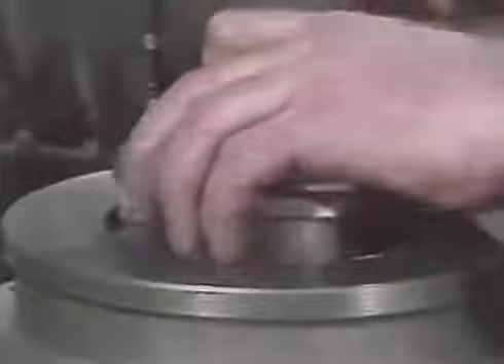As you tighten the bolts down, make sure you tighten them in the right pattern. Tighten them to 50 inch-pounds first, then torque them down to 100 inch-pounds, or 11.3 Newton-meters.

Once you've got them torqued down, make sure that the sealed surface area is completely clean. Before you install the rest of the seal, you need to check the runout on the carbon seal to make sure that it's seating right. You do this with a micrometer. Check it out to specifications in your EMD manual.

First, we'll install the carbon seal like this. Again, make sure everything is perfectly clean. There are 2 feet on the seal retainer that fit into notches in the carbon seal.

The flat side of the outer seal should contact the carbon seal. The concave side should fit up against the inside of the seal retainer ring. Make sure those little feet seat down inside the slots in the carbon seal.

Before you install the seal spring, you'll want to put the impeller key in place and check the depth of the key against the shaft key seat to make sure that there's clearance.

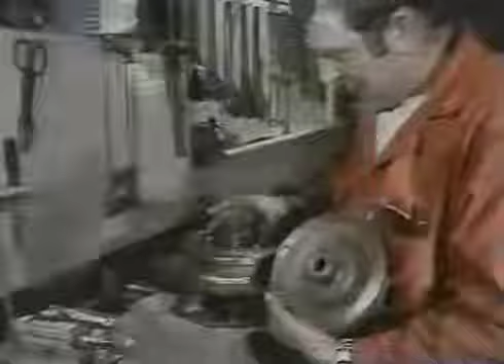The narrow end of the spring goes in first, and this foot on the spring fits into the tab of the seal retainer. Now we can install the impeller on the shaft.

Notice when you get this installed that the large end spring foot fits into a notch in the impeller. You'll need to make sure that this seats while you're installing the impeller. The best way to do this is just make sure that the foot is positioned 180 degrees away from the impeller shaft key. Otherwise, the impeller won't seat.

Now we can install the drive gear key and the drive gear. When you're installing this gear, make sure you put it on the right way. If you look at both sides of the gear, you'll notice that one side has a deeper inset than the other side. The deeper inset should go toward the housing.

Next, secure the assembly. Both of these nuts have self-locking devices on them. You should only use them once, then they should be thrown away. New ones are not included with the kit, so you'll have to order them separately. There have been a lot of pumps in the field damaged because one of these nuts came loose. We've already put the drive gear washer on. This nut gets torqued down to 265 foot-pounds.

On the other end, we install the impeller end nut and washer. This nut gets torqued down to 80 foot-pounds.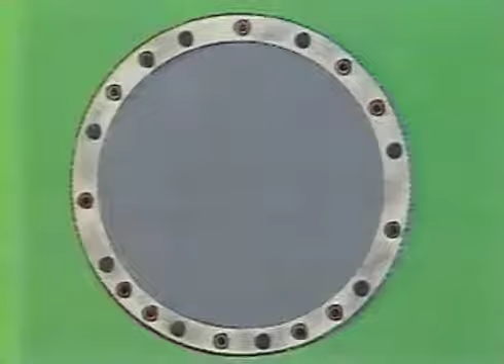Check here too. Now, you might have noticed when you pulled the head off that your head-to-liner grommets were cooked out. This means that the head overheated and was probably damaged to the point that you can kiss it goodbye. If these grommets appeared to be okay, and you didn't see any physical damage, then you can go on to the next step, which is a thorough cleanup.

You need to use a suitable solvent like Varsol or fuel oil to loosen that baked-on carbon. It's okay to use a scraper on the outside diameter and the portion of the firing surface that's smooth. But on the portion that's grooved like a phonograph record, you should use a wire brush in a circular motion to help get down into the grooves and clean them out.

The stud holes, injector well, and valve guides need a good cleaning too. Use a bottle brush with a stiff fiber bristle. Everything has to be really clean. That's important in the next inspection step and in the life of the head. And that means less work for you in the long run.

Don't forget to clean the rest of the parts too. The springs, spring seats, and spring locks or keepers should be cleaned with the same kind of solvent. Now keep in mind that the problems are easier to detect on a clean head, so any extra effort in cleaning at this point will probably pay off.

Once you have all the cleaning done, we can give the head a more critical inspection. First, we'll check all the parts visually. Then we'll give the head a water test and dye penetrant test, and we'll check the head dimensionally.

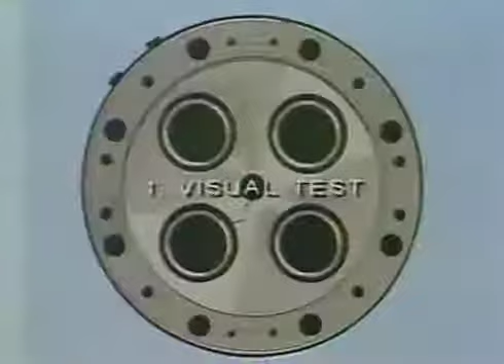The eyeball test is first. Look for cracks. Cracks are most likely to occur on the face between the exhaust valve ports or between the exhaust valve ports and the injector well. Inspect the whole head because it's possible you could get a crack somewhere else too.

Take a good close look at the valve seats. They should be smooth. Is there any channeling or what you might call guttering or burning? Any signs of these problems could be cause for rejection of the head.

Scratches or nicks in these areas will mean that the head will need fireface refinishing, something you'll have to send into the shop to have done. Small scratches or nicks in the phonograph finish area, which are not in the sealing areas, won't require refinishing.

Check all the sealing areas, like the head gasket area, and where the grommets are placed in the water cooling holes. Once you're sure all the gasket areas are okay, go ahead and check out the exhaust valves for any obvious cracks or channeling or fretting.

Look for wear on the stem and the lock groove, or anywhere along the entire stem surface. If you find any of these problems, you can just pitch the valve in the trash. Any valves that look okay should go to a shop for proper reconditioning.

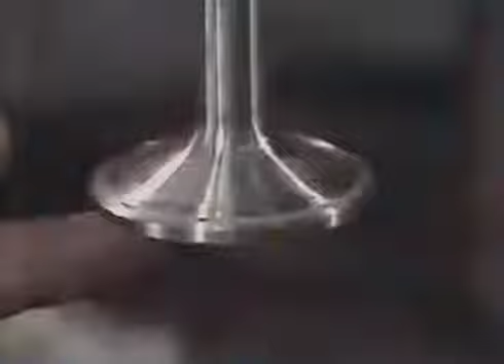This is something you can't do justice to on the rig. Valve reconditioning is just too critical. Leave it up to somebody else. In other words, we're going to be using all new or newly reconditioned valves in our rebuilt head. It's the safe thing to do.

Okay, so much for the eyeball test. Let's get down to the real testing procedures. First is the water pressure test. There are two different ways you can do this.

You might have one of these pressure test jigs, or you can make one up. It's nothing more than a plate that can seal the water passages off. It bolts onto the firing face of the head.

Now apply about 90 to 100 pounds of air. Stick it down in water with a temperature of about 160 degrees. You will need to keep the head submerged for about 2 minutes and maintain a temperature of 160 degrees. The hot water helps to open up any of the small cracks so that leaks can be easily detected.

If you can't do this on location, there's another way to test for small cracks. It's not quite as good, but it'll work better than just eyeballing. Use the same kind of plate bolted on the firing face. Notice that it has the center cut out to reveal any leaks that may show up around the valve ports. Now, bolt the water line onto the discharge surface, same as you would have if it were air pressure.

Send in about 40 or 50 pounds of water. Of course, your head should be absolutely dry to help you determine where any leaks might exist. Leaks around the core plugs can usually be fixed by replacing the core plug with a new one. A leak anywhere else on the head is a good indication that this head is scrap.

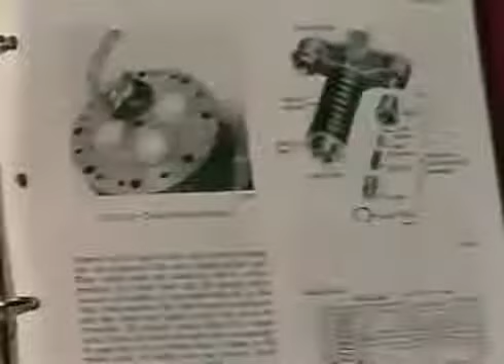Okay, the next test is a dye penetrant test. You'll be doing this on other parts too, like the piston. This test is a substitute for magnaflux, so if you can perform a magnaflux, do it. It's better. If not, here's how the dye penetrant test is done.

It's a three-part system to expose cracks. The first part is a red dye that you spray on and let set for a couple of minutes to soak into any cracks that might be present. Be sure those suspect areas, like the valve ports and facing at the water discharge, are well covered with dye.

Now, use the spray cleaner and a clean rag to get the red dye off. When you've removed all of the dye you can, take the light gray or white spray and apply it thoroughly, as you did with the red spray. Within a few seconds, the red dye will show up anywhere there's a crack, just like this one.

Most all cracks that occur will be between the valve ports and the injector well. Double check these areas, as well as the machine surface of the water discharge elbow. If everything checks out all right, go ahead and clean it up. If you do have a crack, no amount of liquid steel or anything else is going to make that head work, so you might as well scrap it.

Okay, the last check before we begin reworking the head is the dimensional check. Measure the inside diameter on the valve guides at two places, 1/2 inch from the top and 1/2 inch from the bottom. If either reading is more than 633 thousandths of an inch, you'll have to replace them. Look for any evidence of galling in the guide or bore areas.

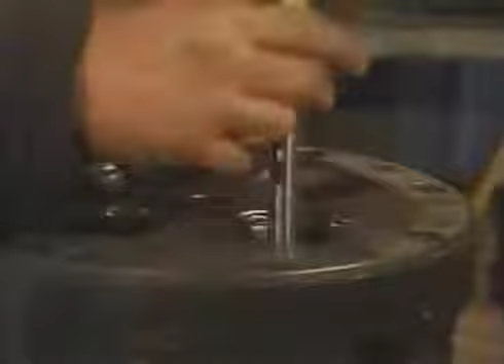Put a new valve in each of the valve ports. Then measure the vertical distance from the fire face of the head to the rim of the exhaust valve. If it's more than 93 thousandths of an inch deep, you'll just have to junk it.

Now for the fun part, reworking the head to make it ready for the hundreds of hours of good service it's going to give you. The first step will be to replace any valve guides that may be worn out. Then we'll take a look at the valve seat grinding, which is the most critical step. And finally, we'll go over reseating the valves and reassembling the head.

Now, if your valve guides do need to be replaced, here's how you do it. Put the head upside down on the press. Block it so that the firing face is parallel to the press platform, and the guide to be removed is directly under the press. Get a guide removal tool and insert it in the guide bore.

Move the press down, making sure that the pressure is smooth and even. The old one should press right out. It's just about the same to put a new one in.

Turn the head over so that it's right side up. Wood blocks, plywood, or masonite are good to use because they won't cause scratches on the firing face. Again, put the opening right below the press. Put a little lubrication on your new guide. Use Lubriplate or something like that.

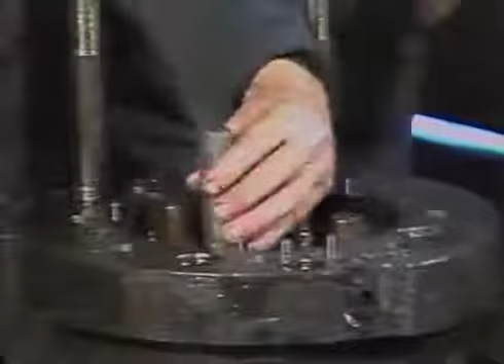Insert it into the head and just barely get it started. Put the installation tool on and press it in very slowly, making sure that it doesn't get cocked. Take it down until the shoulder bottoms. Make sure it goes in straight.

The guide should have a press fit of 5/10,000ths to 2/1000ths of an inch, meaning the guide should be that much larger than the guide bore. If you can't get this tolerance out of a standard guide, there are two oversizes you can use: one is 15/10,000ths of an inch, the other is 15/1000ths of an inch. You can find these in the replacement parts catalog. If the oversize is what you need, you'll have to have the bore reamed so an oversize will fit in correctly. A 15/1000ths of an inch oversize guide needs a 5/10,000ths to 2/1000ths of an inch press fit.

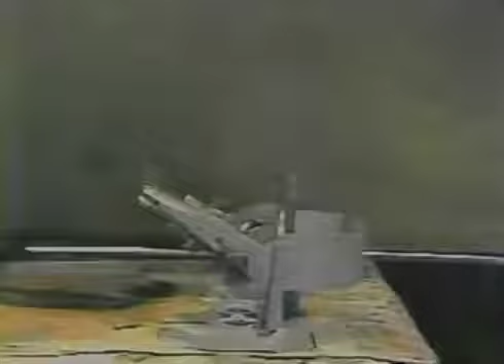The first stage of the process is to dress each grinding wheel. The angle is extremely critical, which is why you need a separate dressing tool for each grinding wheel. If you only use one dressing tool to dress all three angles, the setting is constantly changed for the different angled wheels, and the same wheel will never get the same angle dressing twice in a row. That means shorter grinding wheel life and, what's worse, a screwed up valve seat and maybe even a scrapped head. The dressing tools should be set and left alone on that setting.

Get your first grinding wheel. Lightly oil the dressing tool pilot and mount the wheel on it. Adjust the spiral sleeve until the wheel just touches the cutting diamond. There's an adjusting screw here to make the final adjustment. Check it by hand, turning it before you begin.

Then apply the motor and spin the wheel. Make light strokes with the diamond. When you've got a nice smooth cut on your wheel, go on to the next one and give it a good finish.

Now that the grinding wheels are properly dressed, put the head upside down on the workbench. Block it with wood like before to make it level. Now put an abrasive cloth between the valve and the valve seat and turn it by hand to clean the seat off.

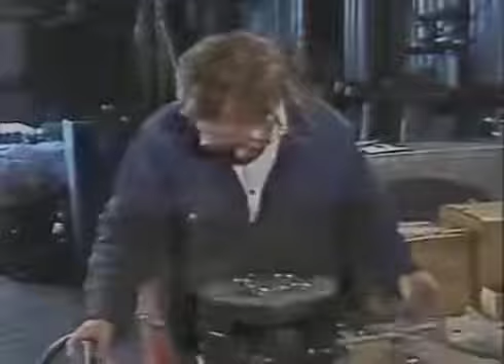Raise the drive motor before shutting it off. This will cause the spring to raise the grinding wheel off of the seat and prevent scratching the seat when the wheel stops turning. After the 30-degree wheel, the 60-degree wheel should be applied. Here, we're grinding this area to clean up adjacent to the 30-degree area.

All right, let's get the 15-degree wheel. It brings the outer area down farther and further accentuates the area that will be the valve seat. You can see how this process refaces the valve seat and gives you a good clean seat for the valve to seal against. Next, you'll need to check what you've just ground to be sure that the valve seat has the proper dimension of 93 thousandths to 125 thousandths of an inch. You might want to check the specifications in Section 2 of the engine manual.

You'll need to use the dial indicator to check valve seat runout. That's the position of the valve seat in relation to the center of the valve guide stem. The indicator should be placed over the pilot and adjusted so that the ball of the gauge is slightly depressed against the valve, and so that the ball is at the center of the 30-degree seat. Rotate the rider and watch the indicator reading. Ideally, it shouldn't move at all, but you can accept a runout of no more than 4 thousandths of an inch.

If all checks out well on all 4 exhaust valve seats, you can install the new exhaust valves. Remember, don't use your old valves. Use only new or reconditioned valves. Drop one in each of the exhaust ports.

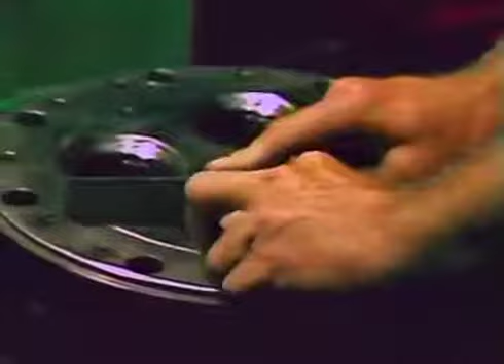We'll need to check the vertical distance from the fire face. Take a straight edge and lay it across the fire face over the flat of the valve. Check with a feeler gauge to see what the distance is between the flat of the valve and the straight edge. It shouldn't be any greater than 93 thousandths of an inch.

If it is, and it's a reconditioned valve, replace it with a new valve to try to get the required dimension. If it's still greater than 93 thousandths of an inch, the valve seat has been ground too deeply into the head, and the head will have to be rejected. Before installing the new valves, the head should be cleaned to get rid of all grinding deposits.

If all 4 valves pass this test, carefully turn the head right side up. Be careful not to slide it around. You might scratch the fire face.

Now install the valve springs and valve spring retainers. And put the spring compressor in place. Now, compress the springs and install the valve keepers. Make sure that they're in good condition before you put them in. Then you can pull the valve spring compressor off.

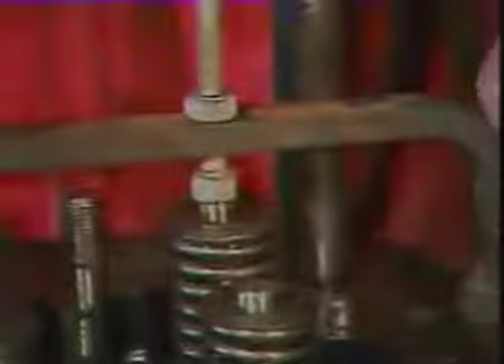Put the tram down onto the head surface. The tram feet and head surface should be smooth and clean. Apply it so that the adjusting screw can check the 2 valves that'll be under the same valve bridge. You might have to loosen the screw to make it fit. Adjust the screw to fit the taller of the 2 valves.

Now, slide it over the other valve and check the clearance with a feeler gauge. The clearance must not be more than 1/16 of an inch. If it is, replace the high or longer valve. Don't grind the valve tip, because these are hardened surfaces and grinding could make them crack. Check the other pair of valves too. Remember, 1/16 of an inch is the maximum clearance.

With that done, flip the head over and rest it gently on the rocker arm studs with the firing face toward you. You should have a valve seat seal tester. If it's old, you can test it on a piece of glass. It should stick for at least 2 minutes.

To test the valves, clean off the face real well and put a light film of oil on the tester cup. Stick it on over one of the valve seats. The handle ought to be in the 6 o'clock position. That way, if the suction is lost, the tester will fall off and you'll know if the seat is bad.

It should stay for at least 2 minutes without losing suction. Just pull the release trigger to get it off. If the suction tester falls off in less than 2 minutes, the seat will have to be reground so you can get a better seal.

That's it. Now you ought to be sure and return your old valves to a shop for reconditioning. Remember that we only install new or reconditioned valves into our heads. Your head should be ready to go unless you have a broken stud or a stud with damaged threads.